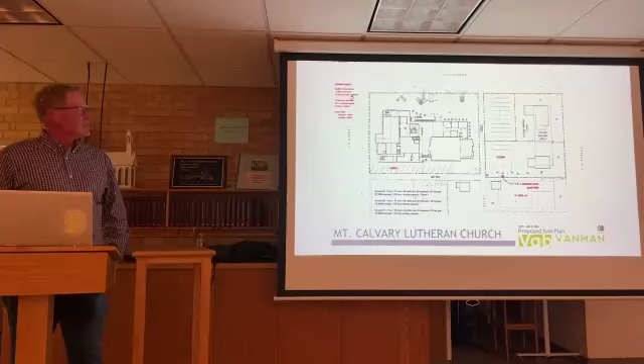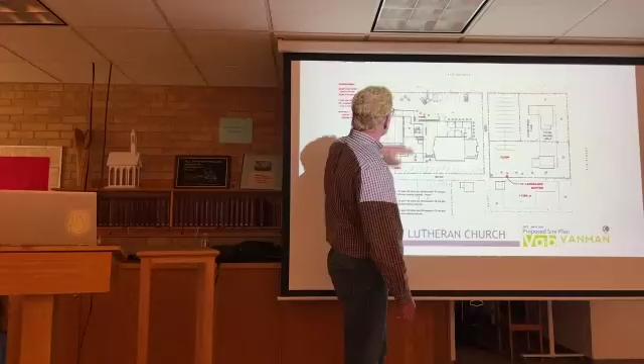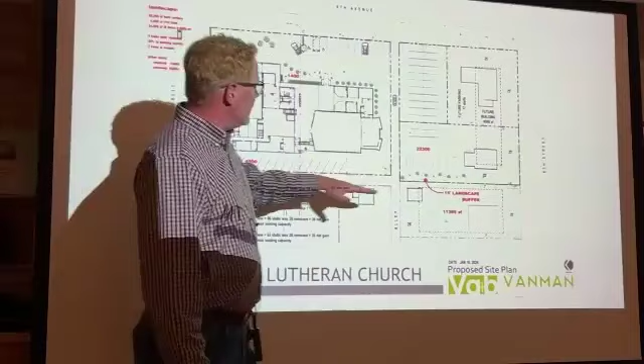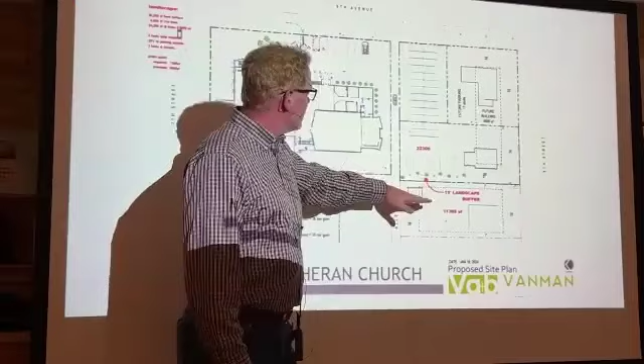It's getting a little washed out on the screen—new access drive coming in here, coming around the parking and exiting back out this way. We continue to maintain the alley with the existing parking along the alley, with a few added new stalls in this space. As part of this plan, we talked earlier about being good neighbors, being good stewards to the Lord with what we're doing here, but also being good neighbors to those around us. Creating buffers—berms, plantings, shrubs, trees—to block ourselves from the parking to the neighbors, and there's also a buffer on the parking going towards 6th Street. So that's kind of a general site layout.

If you have any questions, please stop me at any time—shout it out, raise your hand, whatever you'd like to do. I'm happy to stop and cover questions as we go, or we could save them all for the end.

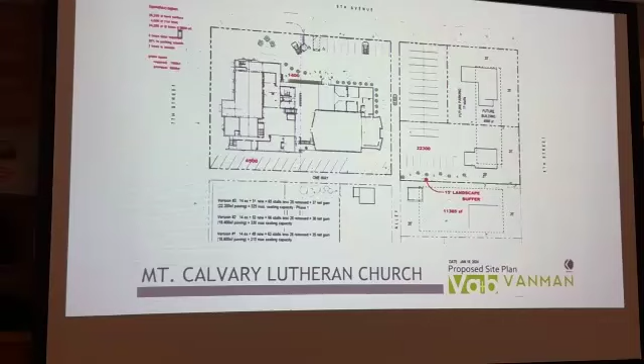I also want to note as far as what's being created on the site. You have existing parking, and it's a little washed out here, but we're incorporating the new building over a large portion of that. We have a net gain of parking stalls—38 additional new parking spaces being created, even with the removal of some of the existing. So a net gain of 38 parking spaces.

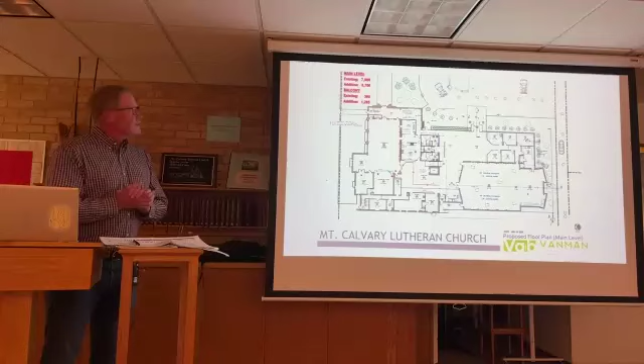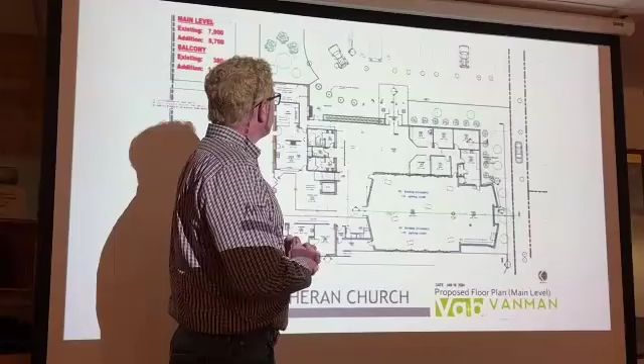This is the main level as you walk in. So back to our entry, you come in, we have a drop-off canopy, so you can swing in with the drop-off canopy. We have a nice plaza out here. I've jokingly referred to this as a barbecue area, potential to do some men's group, getting a big roaster out there and doing some barbecue.

As you walk into the building, we have the fellowship welcome area, the receptionist, and then we have our office, conference room, and different offices, workroom, along with sacristy to serve worship back at the altar.

As we walk in, we have the large open fellowship area, and this is going to flow into your current worship, which we are designating as your new sit-down fellowship area.

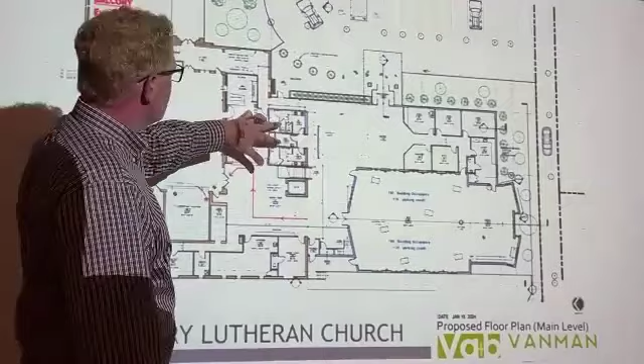So in the heart of the church, on the food portion at least, we have the kitchen designated in this area with dish return that would serve directly into the new fellowship area. New main bathroom groups are centrally served, so they're easily accessible and visible. And then we have loading for worship happening, and of course the new worship facility itself.

We're looking at retasking the existing office area space along with the back altar. These would all be new meeting room spaces.

Along with the lower level, I'm going to skip back and forth here real quick to show you, because when you walked in the door at the main entry into the open fellowship area, this stair right here is the connection point to the lower level. And that brings you down right to the children's area.

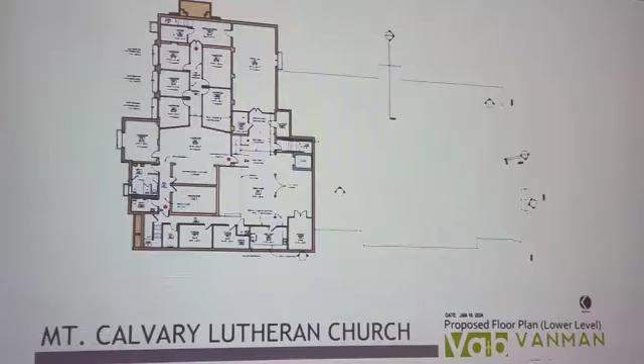So you came down out of the main lobby area into the children's lobby, and then these red stars are designated secure access points. We have 3 secured access points. So this entire children's ministry area is under the administration of the children's ministry, not accessible to the rest of the congregation without coming to one of those secure access points.

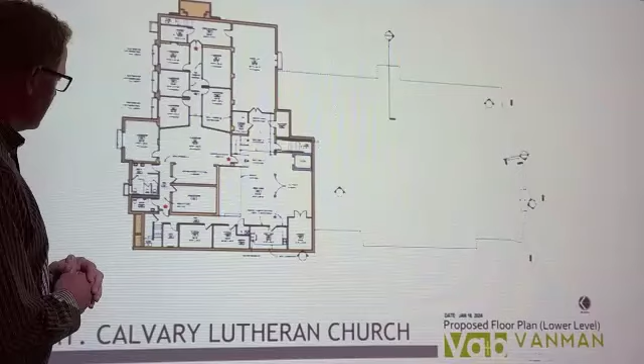So we've remodeled the lower level. We've included new light wells along the north side here to bring additional light into the space, creating the classroom space. The kitchen's obviously removed, which is now classroom space. The bathrooms have been removed and replaced with ADA compliant restrooms on the lower level. The secondary kitchen, I think we're calling that our arts and crafts area, along with the ed office downstairs as part of that, and storage too.

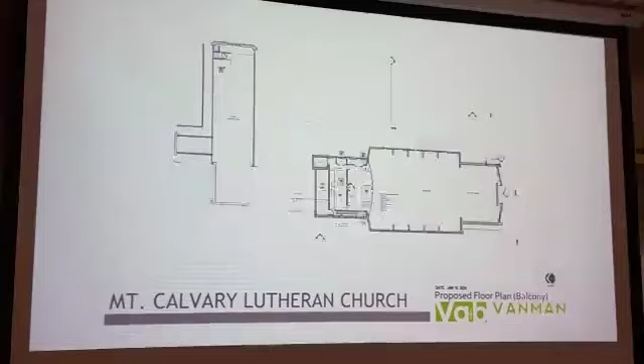This is the upper level balcony. I'm going to flip back to the main level. On the upper level balcony, you have the stairs that access the balcony right here off of worship. And there's also the elevator with access to the upper level.

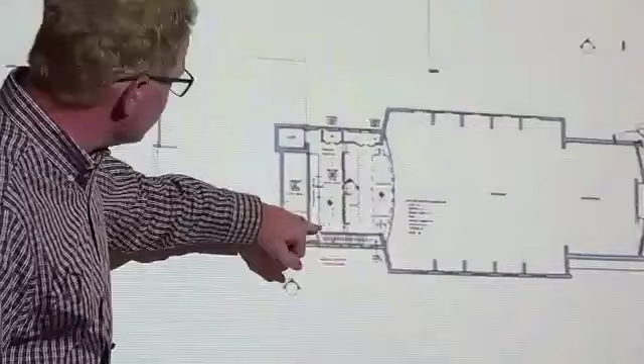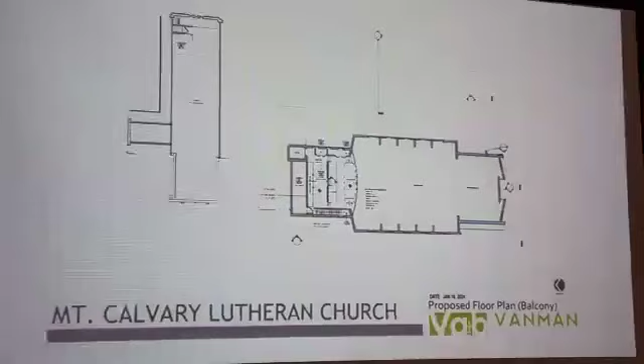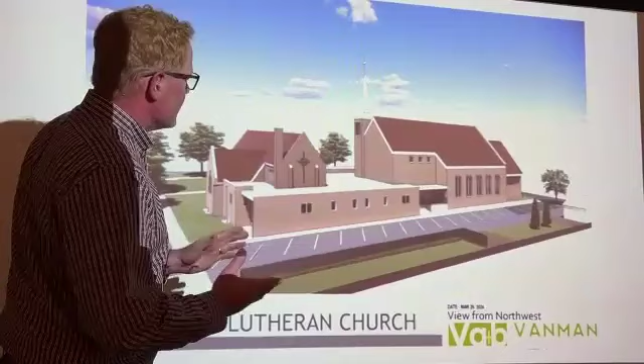Here we're just a little more elevated up in the air so we get a better view of what's going on. This is from the back alley, so it would be the northwest corner looking back. This would be the existing church offices back at the altar here in the church itself. And then we're seeing cut through here - this would be the fellowship addition going through here with the back side of worship itself. We're showing the natural light with the windows. You can't see it in this visual, but reuse of stained glass is part of that.

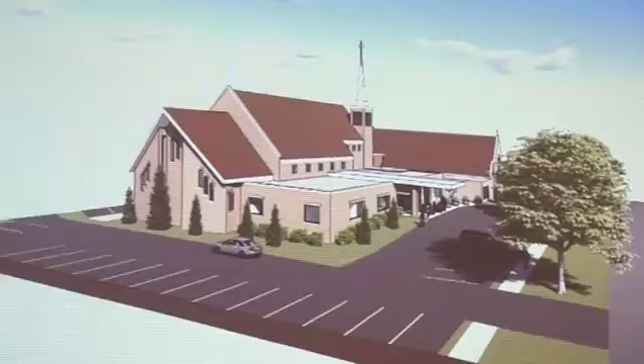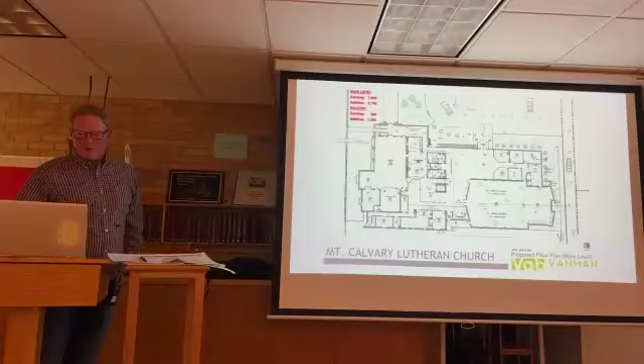Is there any parking along 6th Street, on the property that we own? The city's not allowing us to build parking directly to the street, so the parking stops back here. We have the buffer, that's part of the historic district you're in. So we're getting a net gain of 38 parking spaces, but not parking right up to 6th Street.

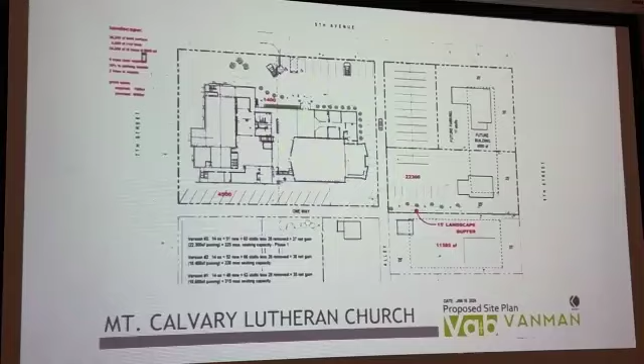What about snow load on the flat roofs? What do they have planned for the snow to come off, either melt it so it runs off or... Sure, a couple of different ways. We call them minimal slope roofs. I understand flat roof because it looks flat, but code requires it has to drop 1/4 inch per foot, so we call it a minimal slope roof.

You can do EPDM. Yep. No, I just like the term too. The architects always drill it in that you have to call it minimal slope for code issues.

But a couple of different ways to tackle it. EPDM obviously has a black roof, a black membrane, heats up and melts the snow. The actual roof design itself is going to be designed to meet the snow load. And anywhere we have a slope roof that comes down and hits a minimal slope roof like that, you have what's called a drift load. The drift load is 150% of whatever the snow load calculation is for that, so you account for an area where additional weight is going to be piled up essentially.

HVAC-wise, obviously we put nothing in this area, those are key areas that cause an issue with water infiltration, we'll avoid that. If the question is more directed to do we want a minimal slope roof versus a slope roof, that's something we can definitely look at. This has different design aspects as far as emphasizing worship itself versus the office fellowship area in the front of it. We've done a lot of minimal slope roof design without issue.

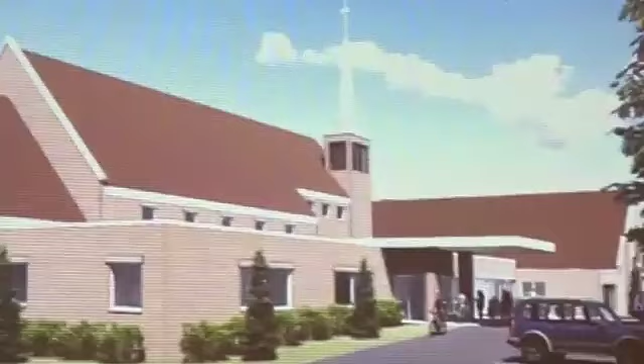On top, is that like a bell tower or what's that on top? It sure could be a bell tower. It could be some louvered cupola also. Could be an electronic clapper versus an actual bell. Could be a number of things. Like I said, we're early in the process, we're just trying to create a vision here. Nothing is finalized and we are open to all sorts of comments and design input. But right now I would say the elevator shaft, what becomes part of the steeple, those are probably a louvered grill with either a bell inside or an electronic clapper, which is essentially an electronic bell.

Any other questions? One of the questions we received beforehand was what was the size of the new addition? The new building square footage is 10,100 square feet, and that's both the main level and the balcony level combined.

The second part of that same question was what was the existing square footage that's going to be remodeled? Now, as I answer this, there's different variations of what's being remodeled. Some might be extremely light remodeled, like the existing worship space we're turning into fellowship space, it might just be touching the carpeting and some lighting upgrade. Other spaces, like the kitchen area, which is your current 1994 addition out here, that's a complete gut and redo of infrastructure.

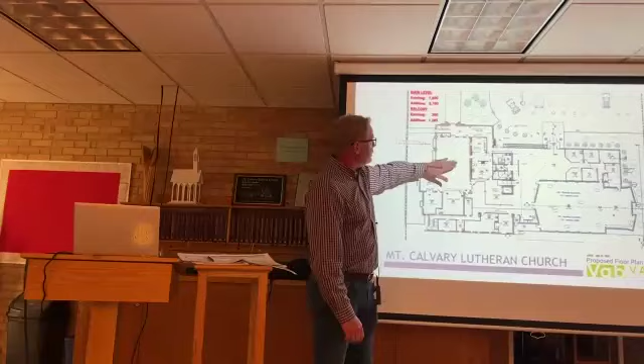Where the new addition goes on to the existing addition, the roofs - is the plan to butt up the old with the new, or is it to build over the existing so that it's essentially two separate buildings, but the new roof goes over the old roof instead of butting up to each other? So there's a couple of different things happening. The existing worship right now has a slope roof that comes down to a minimal slope roof here over the space we're in right now.

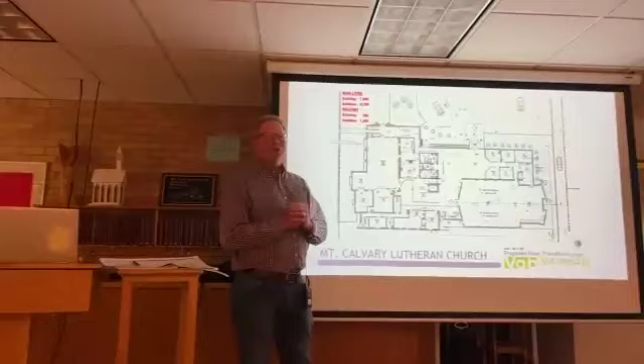The new addition starts right here on this wall line, so essentially this would just be a parapet - a parapet is nothing more than a wall that comes up through the roof that separates the two. It'd be two separate roofs, but of equal height. That was part of the reason the minimal slope roof was matching, without spending money replacing what's existing here already. But we're doing something with that from a stewardship standpoint. Did that answer the question?

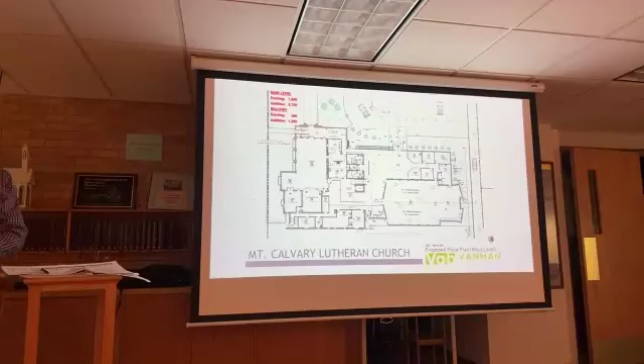I think you're just gonna butt them up - but yeah, that parapet, they're gonna butt together, the parapet covering. And that wouldn't be noticeable. You wouldn't see that from the ground, that would just be on the roof itself.

I'm just thinking of the experience I had with the buildings I've been involved in. I found that having a roof over the existing roof, you build the new roof over it - they're really, you don't try and keep the seam. When you butt them up like this, in my experience you have more chance of leakage because you don't get it sealed. Anytime you go to a vertical surface you run a risk of water infiltration, which is why we do the parapet with the cap flash to limit that. So the reason we essentially abut them together and don't go to a vertical surface is that's where water infiltration happens - 80% of all water infiltration happens at that vertical surface, at that roof change. Very astute.

How successful do you think we will be in tying together the exterior aesthetic with what we currently have? Great question. This probably best dictates that.

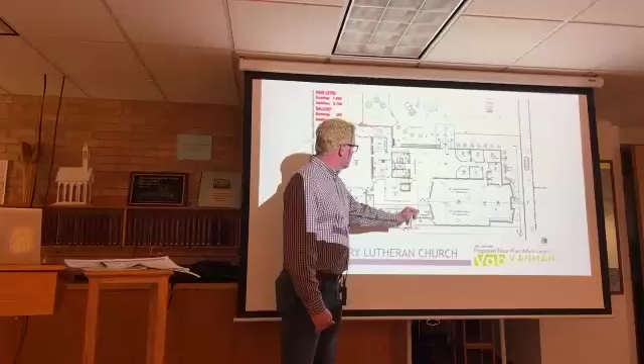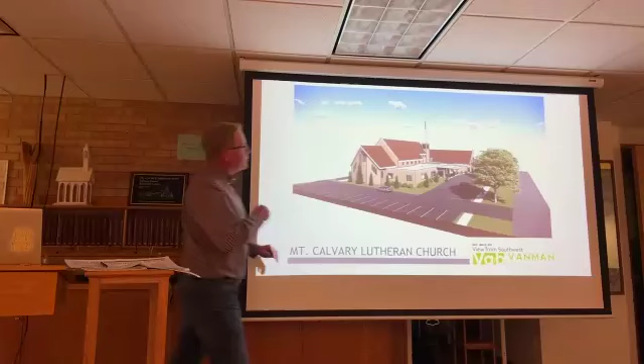So when you walk in the front door of the new building, instead of it being this high where that's the ceiling, it'll be, I think we were shooting for 11.5 or 12 foot ceiling height. And we don't have a great visual showing that. What you see is the canopy stepping up this section right here, but the physical roof structures themselves, because of the front wall essentially blocking that, you're going to see the same visual coming across there, until it hits the old roof line.

So go back to the previous height - I'm sorry, this is getting into the detail. Here we go, next one - there, if you follow the new roof line all the way across, and it's the old building - you can see the step down right there. And that's just a visual effect to give that same facade across the whole front.

I just wanted to emphasize the interior space is going to be quite a bit higher than we're standing in right now. Correct. And the goal is structural-wise to use a bar joist system to give us as much height as possible in that space also.

One of the great attributes when you walk into the front door and you're in that open fellowship space, we want a ceiling height that's high enough. From a visual sight line, things look smaller the lower the ceiling is, but also acoustically, the higher the ceiling, the more bounce there is. When I talk, or you talk, or 100 people stand together and talk, you get all that reverb. I know this as I've grown older, reverb really hurts the conversation I'm trying to have with one person in front of me when I'm hearing the other 8 people around me. As you extend that height up, it pulls that sound away, so it has an acoustic dampening mechanism, which is why we always want to bring that height up in fellowship as high as we can.

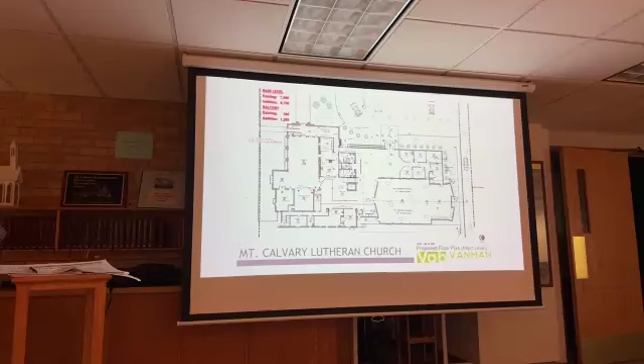But that's a pretty darn tight corner - I'd be hard pressed to see a semi truck come into it. That should be his first indicator, and secondly, he should see there's this canopy there, it's not going to fit. But yeah, the goal was to keep the canopy more minimalized.

We had additional conversations as part of the building committee - is it a full drive-under canopy? How big is the canopy? How small is the canopy? Do we have a canopy at all? What's the purpose of the canopy? Is it going to create a bottleneck because everyone's going to try to drop somebody off underneath it? These are all concerns when you talk about the front entry to incorporate as a part of it. So it was a compromise - it was a partial canopy.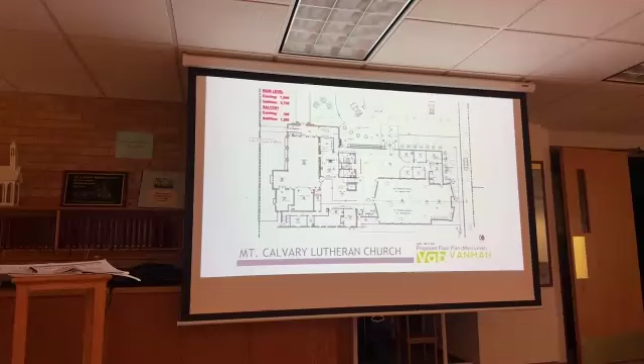Yes, Steve - I know at our other meetings we've talked about this, because we don't see what the inside of the sanctuary is going to look like. Can you kind of share with us some thoughts, some options?

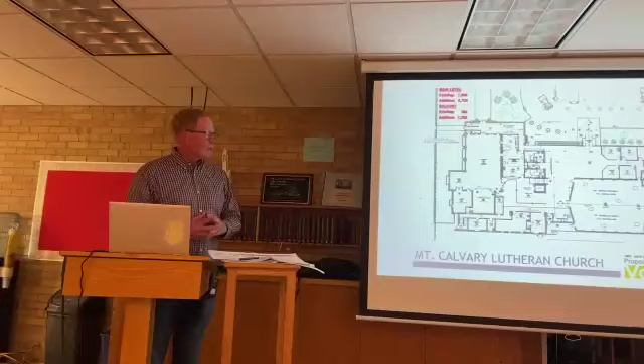The goal again was to make it look very similar to what we have. From a worship standpoint, obviously we're going from the back here - fixed pews as we move forward, and you can see the front of the chancel here. We have the steps, the communion rail, communion rail up to the altar. Then, as I showed on the exterior, these were the arched windows that could potentially be stained glass, bringing in natural light over on the opposite side.

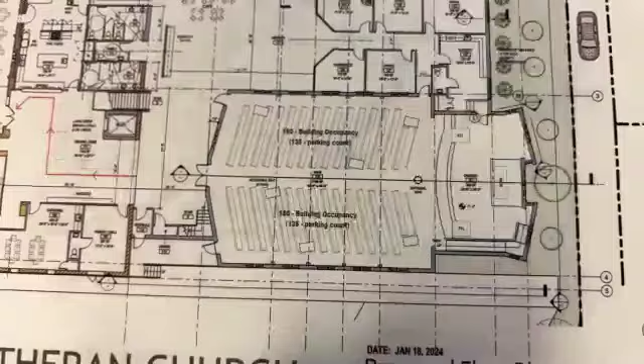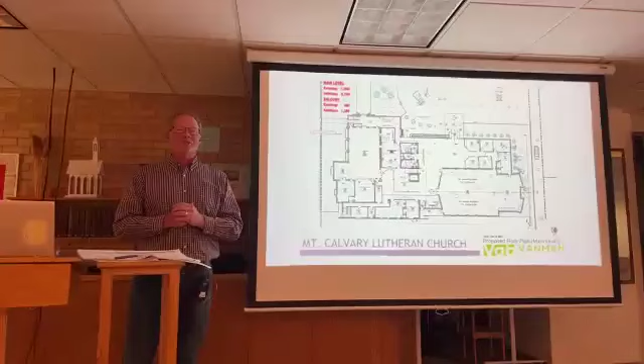There's obviously a difference between the windows to the west versus the east because of the height of the roof here. For the physical structure of the worship space, there are a couple different options we could approach it. We could do something as a steel structure, basically H-beams hidden inside whatever pilaster construction we do to obscure those and make them part of the physical structure.

This is an economical way to build. We've also talked about using glulam, either glulam arch or glulam beam type structure, very similar to your existing worship space, to bring in and replicate as many of the complementary items from the existing building as part of the new worship space itself. So reusing glulam beams, glulam arches, reusing stained glass windows, potentially adding stained glass windows.

The pews, and a lot of similar features with natural light, bringing a lot of natural light into the space. The worship space itself is really being designed for the spoken word, versus what you see in a lot of new churches being built, which are performance auditoriums, black boxes, different versions of church for all sorts I guess. This church has a lot of natural light, a lot of natural wood, stained glass, and is specifically designed for the spoken word - meaning the physical structure, the nave style, long style, amplifies the pastor's spoken word and is really conducive to that style of worship.

Up in the balcony, we have the orchestra pit, so a place for the organ and piano. We have an area for the choir right in between those two spaces - the pit, the choir - and then an area for the bells along with storage, and the access points to the stair or the elevator.

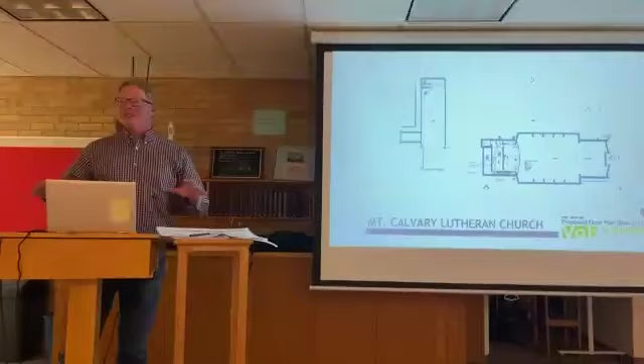Physical materials that we would use inside the worship space are still to be determined. Like I said, we're still in master planning, but I would assume - well, it depends on who you talk to. If you're talking to somebody in the choir, all hard surfaces, tile floor, everything hard to bounce sound - it has reflectivity acoustically. If you're talking to somebody that likes carpet, maybe there's a mix between those two.

Yes. I can't see - go ahead.

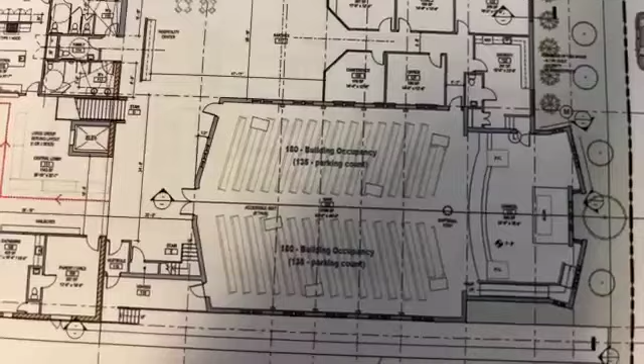Is it here? It is - it's right after the sanctuary, right after the front, bottom center. And this isn't a PDF, so you don't see what I'm pointing to exactly, sorry. Thank you for the description - bottom center. Okay, yeah, oh I see, parent-child, okay.

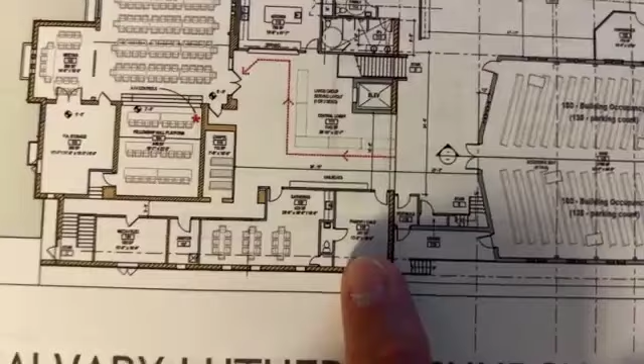The goal with the nursery is always to keep it accessible to worship itself, so a parent can come in and out with quick access. And we've separated it from the children's ministry downstairs for that very specific reason.

I'm curious why - I guess I'm so used to that alleyway being there, and that's what the front of the church faces, the alleyway. That's kind of bizarre to me. And then the other alley in back, which you list as one-way - it's not going to be a one-way alley. Potentially, all the parking is directional.

I understand that, but we've got a neighbor back here whose garage goes out that way, and I don't think she's going to be told which way to drive. And I'm not telling her which way to go. But I find it odd that it faces the alley. It's a sign - it would face the street if all the parking could be out to Sixth Street, but it's not all parking out to Sixth Street.

Well, this won't be an alley - this is just part of your parking, this is what you're referencing. Yeah, but basically it's still going to function like an alley - people will drive through it, absolutely. Yep. There would be a driveway and a parking lot as well.

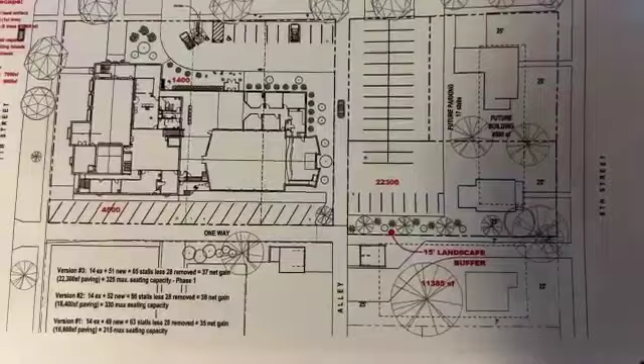As far as sightlines, you won't visually see anything, because all the windows are indirect light, so they're all on the sides. You wouldn't actually see cars driving by during the services if that's what you're worried about. It's kind of like you want to sink all this money into something and then it can't even be seen from Sixth Street, with an alleyway going through it. I just find it odd.

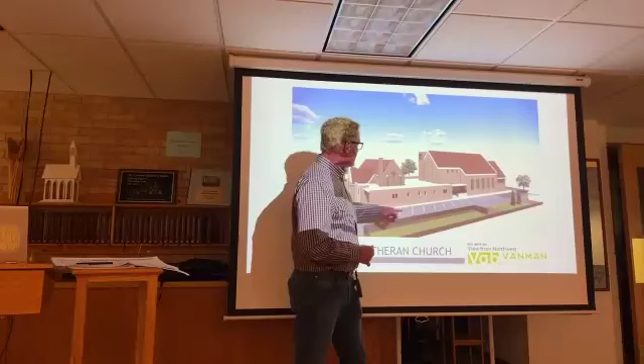So we're about 4 feet above the actual current alley, which is what we're showing here. The windows start about 4 feet above that point if we went down to the floor, so we're quite a bit above. Typically we hold those windows up 2.5 feet, so for your full 6 foot person height, you're not going to see a car pass the alley. You're looking well above that point, depending on how tall we choose to put the windows, as far as visibility to Sixth Street.

That's approximately the Sixth Street view. Now you have to remember there's a house, both houses will be in front of that. Yep, you have to remember there's a house right here. Oh, and then the two that are on Sixth, yeah.

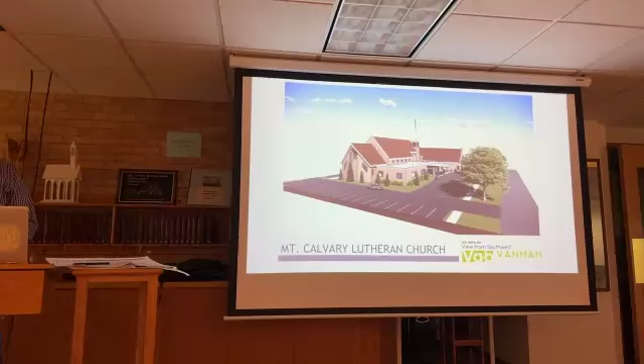So just so everyone's clear, the houses along Sixth Street are in the historic district, but they're also in the commercial development area. That's why the city isn't allowing us to put a parking lot right out to Sixth Street, which we had discovered here a number of months ago. But the house that we are going to have to move is McClemens' house, or the realtor's house, because we need that for the parking.

So that house will be moved, and we're working on that. But the ones right along Sixth Street - like now when I look out there, I can see some cars driving through; when I look that way, all you see is McClemons' house. So with that house being gone, you are going to have some extra visibility from Sixth Street. It won't be blank because there will still be houses along Sixth Street. Does that kind of help?

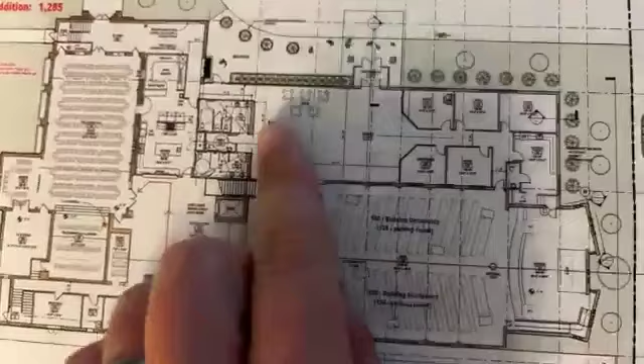Yeah, so as you come in the front door, we talked about welcome space, maybe a welcome desk, greeter, and it's not showing up on the screen here, but you see it on your plan as far as the seating area. This might be soft side seating, maybe comfy chairs with a coffee table. It could be Bible study on a Tuesday night, or it could just be a space to gather and chat.

All this is glass, so this has clear visibility coming out to the patio area where we talked about still pushing the barbecue idea, men's ministry barbecue. And that has access coming back in directly to the kitchen across the hall here.

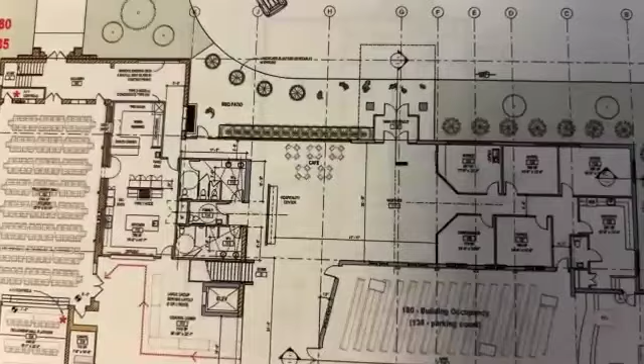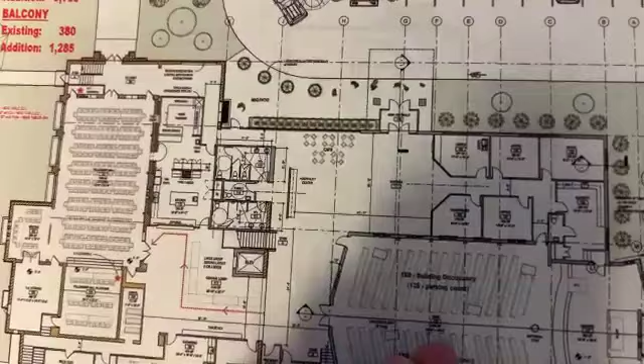But creating also some additional seating possibility for breakout areas, before we start talking about the fixed seating and fellowship, which could be rounds or rectangular tables, however we want to lay it out, as a part of that. But creating multiple spaces that could be different conversation points. You've got your stand-up conversation point, maybe just some high top cafe type tables as you walk in, standing type fellowship, soft side seating for a more intimate conversation where you sit down and come through the space.

How big is that space? I can't read the numbers. It's not labeled for the actual square footage of the fellowship space. Is that the question? Well, I'd like to know what's the width and length dimensions?

Yeah, it's about 32 feet east-west. So pretty much just a little bit bigger than this space, would that be about right? I think I measured it once, and this space, from here to here, is like 30 feet. Yeah, it's a little bit wider than this space, but it's quite a bit longer than this space. So I'm sorry, 30 what by 30?

It's about 32 wide at the worship front door, and it's around 48 in length. That's just the large block area, essentially this space, not including what's flowing back through here. So you have everywhere in back of worship, plus the area between worship and your current worship, which will be fellowship too.

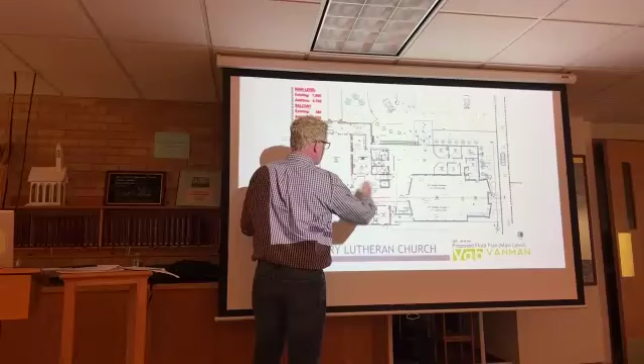Have we thought about where adult Bible study is going to take place? Will that be in the fellowship hall or where's that gonna take place? Well, it depends on the size. The fellowship hall is going to be a large event space. Depending on how you lay it out, round tables, you need 8 people per round versus a rectangular long table, so it's quite a bit of variance for that.

I'd have to look at the plan to see which one we ended up with. This space we've talked about being segregated from fellowship itself to be a meeting room space. We've talked about potentially what is currently the chancel platform being space along with meeting room space. So there's a couple different subspaces depending on the size of the group. If it's going to be 30 plus people, you're probably in the fellowship, would be my assumption, that's going to give you the most space to spread out. But I'm hoping those groups are going to increase in size too, with the new facility.

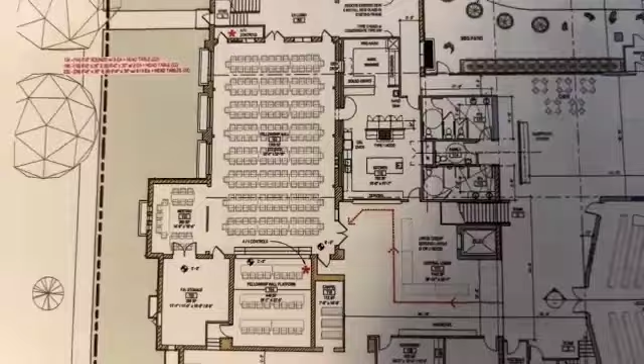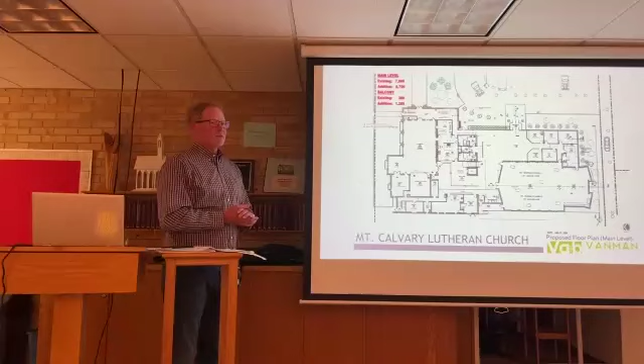Is there any thought of how we will continue our worship while the construction's going on? Because a lot of that space is going to be flipped to new, like where the kitchen is and all that. Yep, it's a great question.

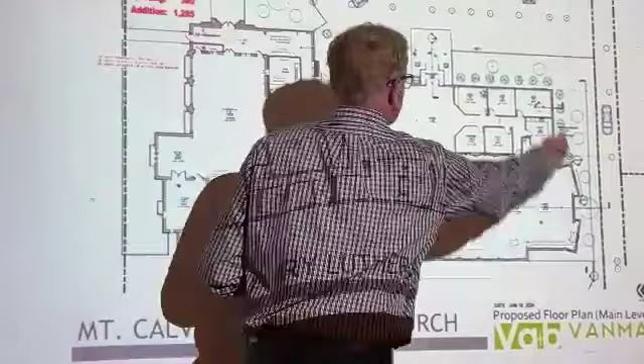Here's your existing building line on the south side. So you split phase the project. This would be my 2 cents, and there's probably 20 different ways we can do this, but we split phase the project. So we do all the footing foundation work for the new construction. Outside of that, we do the superstructure, bring that up, get it all enclosed, and we're getting into finishes as far as rough in for plumbing, mechanical, and so forth.

In the new addition, you're going to start to decide how you're going to split phase the remodel. So that's one phase. Second phase is, do we tackle fellowship? The kitchen area bathroom group is going to be the most invasive without question.

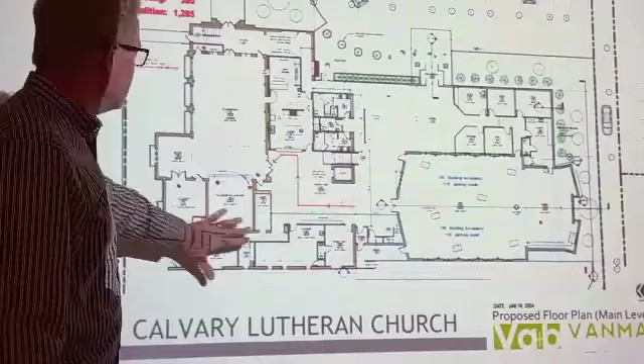That's the area where we have to figure out how to provide restrooms while worship's going on, because the kitchen took those out. So these restrooms will have to be remodeled outside the kitchen phase. More than likely it's new construction, then bathrooms, then we do the kitchen, because we need these bathrooms before we do the interior finishes of the existing building. But during that whole process, you're entering worship from the exterior, not walking through the new portion. So the way it's segregated right now works really well construction-wise.

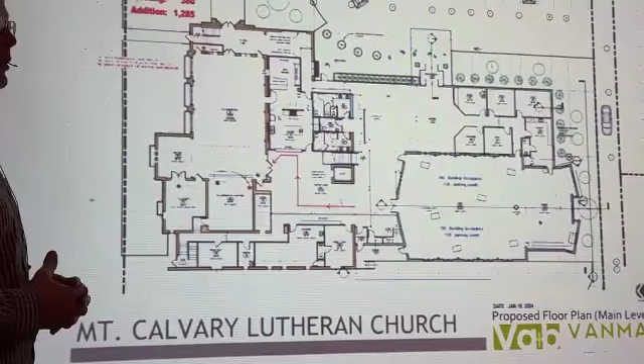And of course, this all depends on how much of the project we build in phase 1. What is phase 1? That's still a question to be answered. Then we have the downstairs area, which could be its own phasing, pretty well self-contained for the kids ministry. That could be with the upstairs existing, with the new construction, or it could be a 4th phase - it could fall anywhere inside of that.

We're able to segregate them enough, but the trickiest area is going to be the kitchen and bathroom group, without question, because they're right at the heart of everything in the existing building that we're tasked with. That space is being tasked. But I think there's a way to do it. There will be some temporary building barriers, dust proofing with poly up and taped off, and there will be construction going on while worship is in place.

Not at the exact same time, though. We always have a policy from a construction standpoint: the construction week starts Monday morning and always finishes by noon on Friday. The rest of Friday is for cleanup, to make sure we're accessible and ready for worship as part of that work week.

What is the exterior height goal, or exterior height, of the sanctuary and the spire?

So the city has a rule on this of 36 feet, but that's where the rule gets kind of funny - the 36 foot is the midline between these 2 points. So we're maximizing the height to give you the best visibility, therefore the best presence to 6th Street and the community. The building is your signature. We're building up to the maximum allowed by code. So I answer with 36 feet, but we're more than 36 because the code allows it due to the sloped roof.

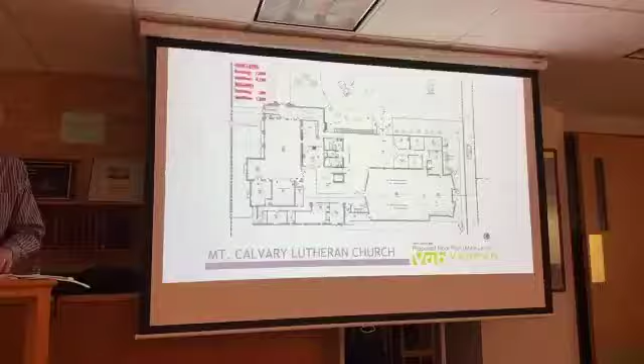So everything is based on - when we talk about occupancy with churches, you're what's called an A3. That's the government's way of saying church, an assembly occupancy. Everything is based off worship itself. There's not a secondary use, which means you're not filling worship with 300 people and fellowship hall with 250 people and kids ministry with 100 people. Everything is based off the worship count, the seating profile in worship. That's what parking is based off of. That's what everything works off of. Does that answer your question?

We want specifics as to area because there's a whole programming thing as far as what the occupancy in every room is, and I can share that with you later - I don't have it with me. That's a rather detailed question, but we have the answer to it.

What do we have to be for it? Worship is 360 - that's packed seating.

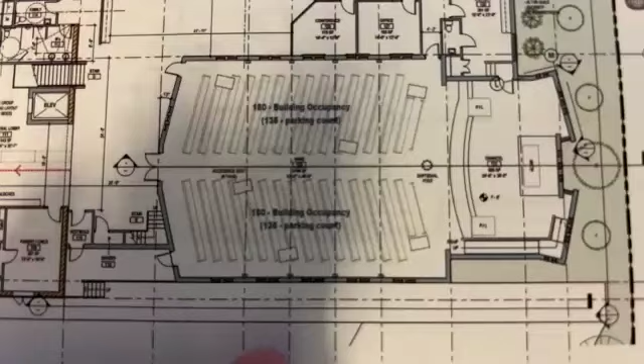What's practical occupancy in the sanctuary? 80% of that - so the 180 on each side versus the 135. 135 is the number we talked about. Usable seating is typically, if it's pew, 21 inches per person. In reality, you're not going to sit within 21 inches of somebody tight to tight, so that's why we say the 80% rule. The 80% rule is if occupancy is 360, you'll feel full at 80% of that.

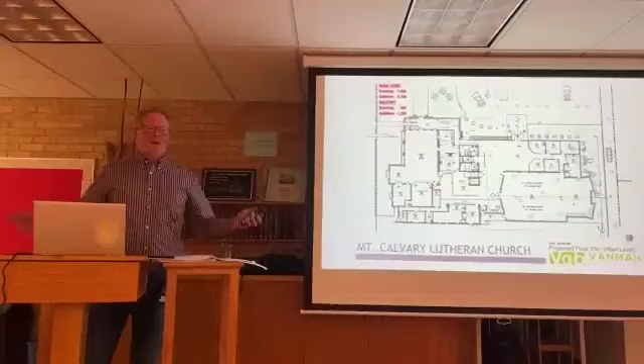Yeah, you can fit more people, but we're Midwesterners and we have our sphere of influence - we don't really like to be so close to people. That's just the reality of worship itself. It's not to say that at an Easter or Christmas holiday service you can't get more people in there, but on average, at 80% of the occupancy of that space, people are going to feel like it's full.

And just for reference, what is our current occupancy in our current sanctuaries? Do we know? I don't have it on the sheet, Jackie. Between 120 and 140, I think.

How many did we have at confirmation second service? I think that was 194 or something, really packed in tight. Someone wrote it down, maybe I'm wrong. Well, some people were sitting out here and about. There's about 10 people in the balcony, and the main floor was packed. And you were correct, that's the 135. That was an 80% occupancy on worship. That's what that number represents.

Just a quick statement on worship, if somebody's wondering why it was designed to the size it is. The goal for worship was for the congregation to worship as a whole, versus if we talked about a smaller worship space, what would be the point of doing two services? It would save us money from the standpoint of the physical structure, smaller square footage, but the congregation would then be split over multiple worships. So the design standard for worship was to design a space the entire congregation can worship inside of, and still have room for expansion as part of that.

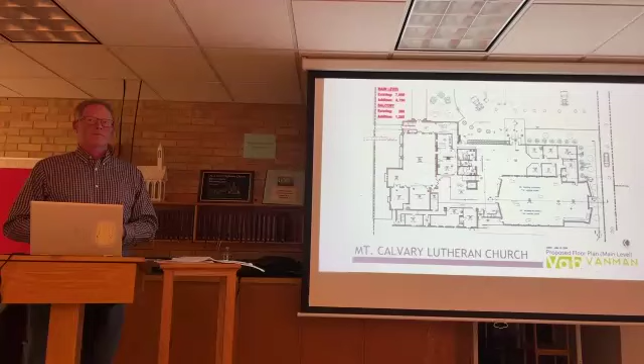They're getting better, keep going.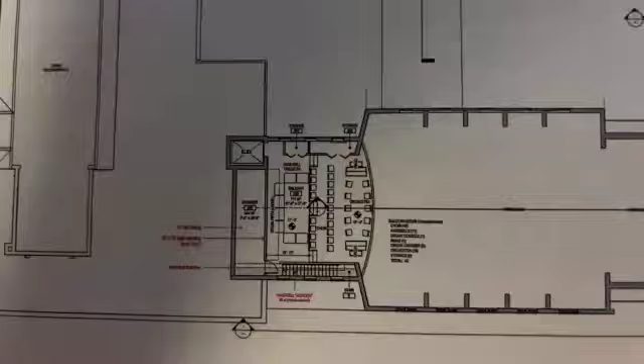You show AV controls in the old building, with the old sanctuary, but not with the new. The AV was on the upper level of the balcony. When you say existing, you mean the fellowship hall? Well, you've got it technically in what would still be the fellowship hall, and I'm wondering why there's nothing for the new sanctuary. Well, in the new sanctuary, the AV control was in the balcony, as part of that. No designated AV booth, but we could incorporate that if that was the will, the desire to go that way. We would have the AV booth for the fellowship, or what would be the new fellowship, for presentations and that type of stuff happening in there. Probably two AV setups, right? Yeah, so we'll keep what's there for when we have presentations, events, that sort of thing, and then we'll have AV equipment in the balcony of the new sanctuary. It's not currently shown, you're right about that.

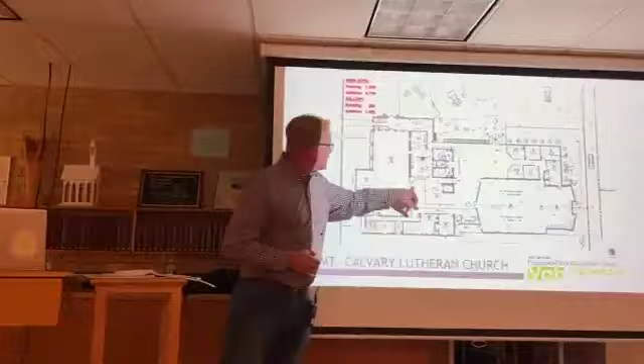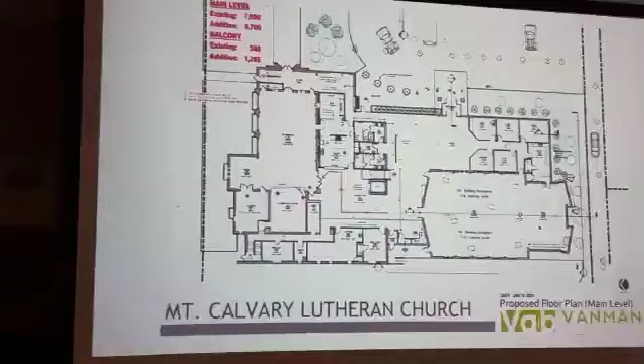There was one question earlier in some of the discussions on coat racks and stuff in the main area. Yes, we need coat racks, or someplace for people to hold their coats. And I'll just say, back to a statement I'll be making a few times: in master planning, we're pretty general, but we have had this conversation, and we have all sorts of space that could potentially be used, skip that last one, that's kitchen access, but we have all sorts of space in this existing area where we could put coat rooms. We try not to make specific coat rooms because they become bottlenecks. You can make it too large, a waste of space stewardship-wise, or too small, and people come in, conversation starts, can't get in, can't get out, and all of a sudden it's not really a coat room, it's just another area of fellowship.

So typically we like to do a racking system, put it in an area that's not visible, so it's just on a wall, but something that's accessible without being completely visible, especially in the fellowship area. We typically stay away from mobile racks, they're not very sturdy and you have to store them somewhere. But yes, we'll have to find a place for coats without question, unless we just want to be like the Catholics and not turn the heat on, and everyone brings a coat to worship with them.

During our discussions we always talked about wayfinding, so when we have new visitors and so on, can they find where to go? We talked quite a bit about that, you want to share some?

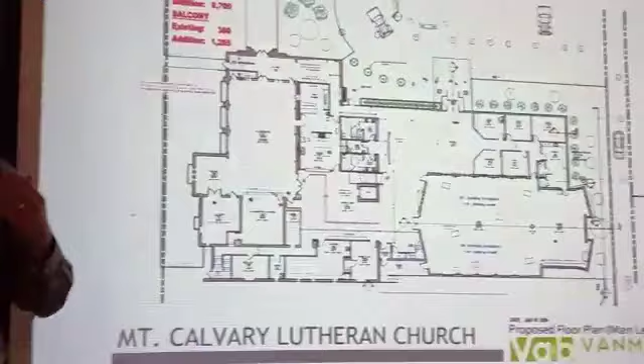Absolutely, we're even on the right slide for it. So we always say we design churches for the unchurched, for the de-churched. Yes, you guys, it's designed for it, but you're gonna come no matter what, we could put the door on the backside, up a flight of stairs, through a fire escape, and you're still gonna walk in. But we want to design a church to make it as uninhibiting as possible for the person coming to church for the first time, or somebody that's gone away from church and comes back to the Lord. We want to make it visible, so we talked about a lot of glass, a lot of visibility, access-wise.

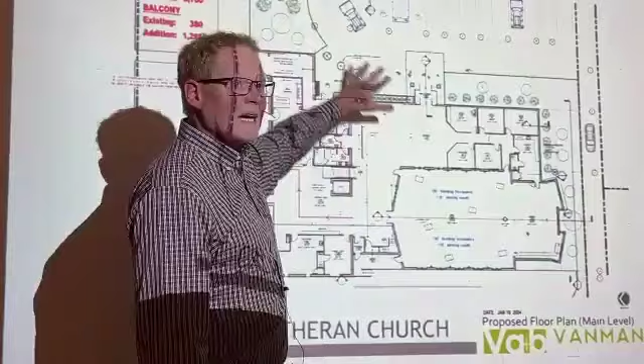Take the mystery out of what's going on inside, fellowship-wise. Show what you're doing in the community. Be a beacon, since it's dark here five months out of the year. So have a lot of exterior glass to show to the exterior what's going on.

But as you come through the door, there are a few things you want to see: first, where's worship; second, where's the coffee, which we have right in front here as our display; and third, children's ministry. Those three things have to be easily decipherable, what we call wayfinding, as soon as you walk in the front door, to make it as unintimidating as possible to somebody as they come to church.

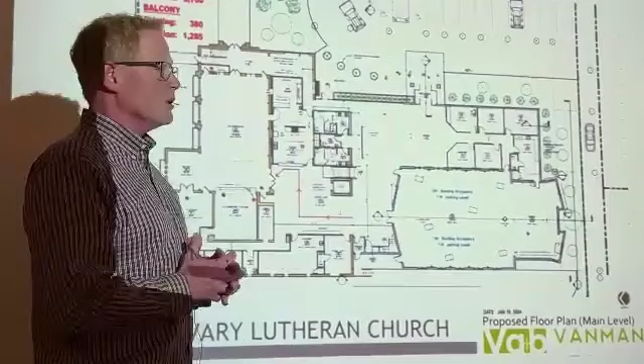Welcome ministry-wise, we haven't shown anything here, but we've had a couple different conversations about how it would be handled. If it'd be a full-blown desk or a mobile structure, but have a place so that when a new face walks in, somebody can come meet and greet them without that person having to traverse across every aspect of the fellowship area, because that can be really intimidating to walk into a room of 100 people you don't know. Versus coming up to a friendly face, shaking your hand, and getting some information as far as what's on offer and where everything is located.

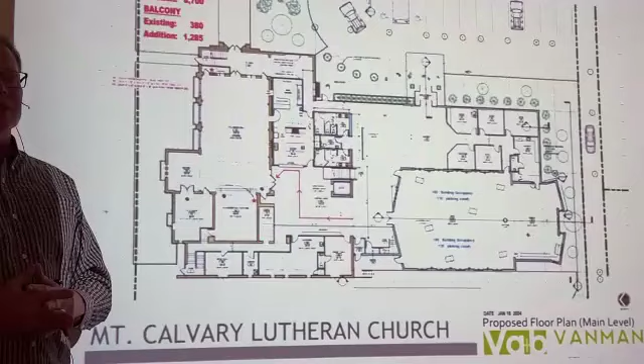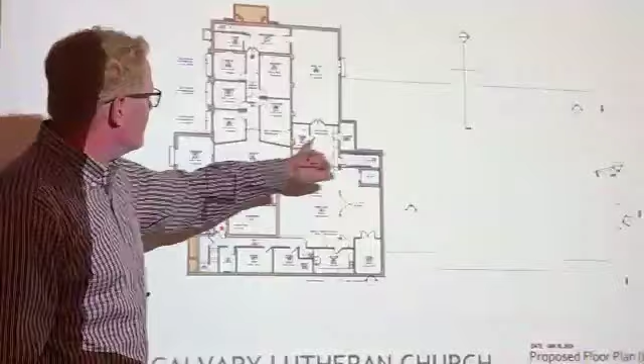And of course, as you walk downstairs, we talked about children's ministry, there'd be signage, some sort of placard to direct you, but as you walk downstairs there is an additional lobby downstairs. As you come in the door, you have almost a family lobby, this open space here.

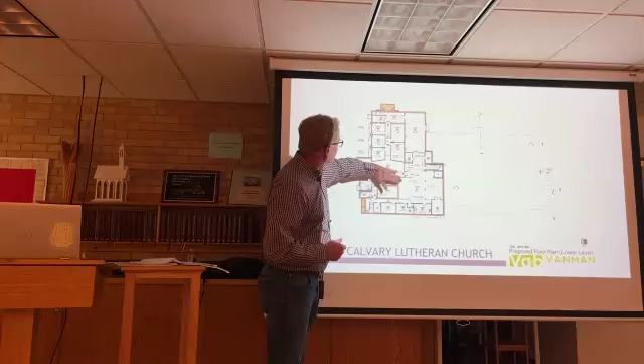Because what you'll see, back to fellowship, is that we fellowship a lot of times in our age groups, we all do this. We try not to, but we do it anyway. And a lot of young families will fellowship together. So creating a space for those young families to share their war stories, parenting stories, what's up and what's going on, having a space for that is an important part. And that happens outside of, like I said, that red dot showing the secured area for kids ministry. The kids are inside that area, and you can't pass in without permission, with their own dedicated bathroom through. So fellowship space is broken up through it.

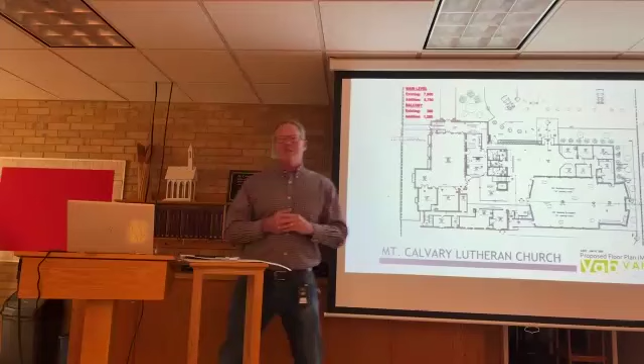The only thing that wouldn't be on that level for an attendee would be your children's ministry, which is downstairs. We're reusing that existing space. Obviously, on the upper level, we have the balcony, hard to do a balcony on the main level.

So we have the balcony for the choir, for the piano, for the organ, all those sort of things, bells and so forth. But as a whole, the heart of your ministry is all on one level without making people traverse up and down, except young families are going to have to go downstairs because replicating another 7,900 square feet for children's ministry would be pretty costly.

Or building new 7,900 square feet. I'm just saying that if we think about where we are here, and we step out that way, that's kind of a drop, so it's gonna be, there's not gonna be a ramp or anything, or?

Yep, absolutely. Nope, it's all gonna be one level going across. That's what I was saying when you brought up the question about the alley. Well, this being 4 feet below the floor elevation of worship, or this whole main level.

That's why you're not gonna see anyone driving through that alley, is because there's gonna be a grade differential between the alley and our main level, which we're standing on right now.

We will continue this going forward, which is going to be, as you drive off on your entry drive here, come in off your entry drive, canopy drop off, we'll be bringing that grade up to meet floor elevation and everything work as part of that.

Yep. So then as you go south, we drop off the grade to meet back to the existing houses, because what we can't do, and we're preliminary here, so we haven't engaged a civil engineer, but we will have to, before we go to the city for the CUP, our conditional use permit, which is required for an A occupancy.

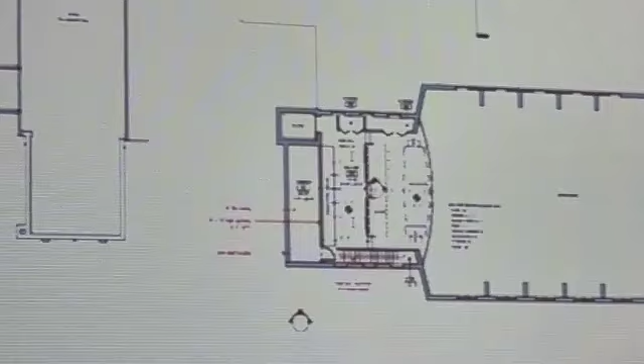We've had several conversations with the organ disassembler and refurbisher, giving dimensions and sizing for both the balcony and the space for the bells — that's actually what this large space is, for the pipes. There's an organ chamber for all of them. The pipes are mounted on the wall, and they'll be elevated off the back of the balcony so we'll have floor space. There was also a visual study that Steve Krause did, showing what you would see from the chancel platform looking back — that's why we have the actual visual.

Can you spell the name of the roofing material you've been talking about? What is it, what did you even say? In the sanctuary, it's glulam — glue laminated lumber. Sorry, glulam. That's a new space-age product? No, it's wood — I just couldn't understand what you were saying. Yeah, sorry, I use a lot of acronyms and jargon, but what glulam is, is wood.

There's a set amount of companies that make glue laminated lumber, that's their actual term. They take wood, put down a layer, add a layer of resin, put another layer of lumber on top, repeat this process, and press the whole thing together under heat. They wrap it all together and let it sit, creating a single structural member much larger than a dimensional 2x. They might create a 14 by 22 inch beam.

Similar to your worship space, that glulam material isn't one piece of wood, it's multiple pieces laminated together, a veneering system. The reason we love working with glulam, same with natural stone, is these are God's materials. You talk about the natural structure of wood, the natural look of stone, things of that nature bring out that beauty. And of course we always give it a nice hot polished sheen with the finish to accentuate the material.

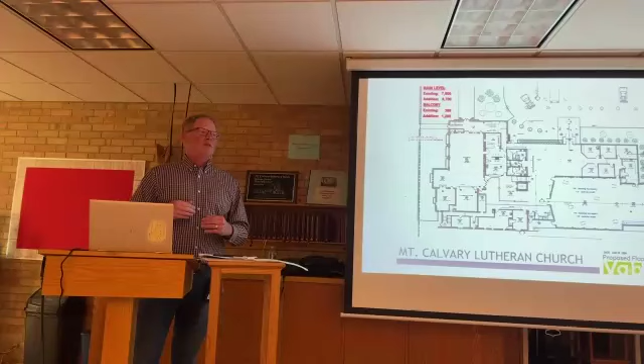So you got a month for a feasibility analysis. After that, you're going to have a conversation with your capital campaign company about whether you want to launch the campaign, and what's involved with it. They've already given you different profiles of a couple campaigns for churches of similar size, templates for you to go through what might be involved.

Typical timing for a capital campaign - let me start this way. Capital campaigns happen twice a year, and only twice a year. They happen in the spring or in the fall. If you didn't launch it in March, you have to launch it in September. You don't start it any other time. So they're typically 3 to 4 months. I'm not sure if they told you anything different.

And the reason those two dates are picked is it's cold here, and people are captive - you're coming to church, you're not going to your cabin. You have your highest attendance either in the late winter/spring or Rally Sunday in September, going forward into the fall for the holidays. Those are the key moments to actually have the capital campaign.

Like I said, it's typically 3 to 4 months. During this time period, you can move forward on the architectural documents. Most churches don't, because it's a financial commitment without knowing where you are on the capital campaign, so I don't recommend it. We do have churches that do move forward - they're on hyperdrive, just wanting to make physical progress.

But you're going to be waiting. So if it's June now, you're probably not launching until September. Then September, October, November is the capital campaign. At the end of the capital campaign, this will be the decision: do funds equate to the entire plan we've laid out here, or do we need to subdivide it, create pie pieces, and phase the project?